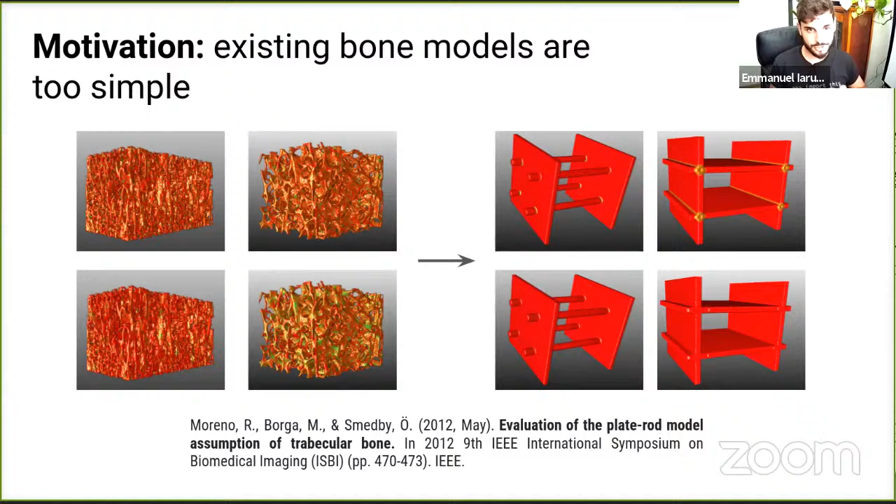This is often a very tedious and complex procedure, which could be avoided, especially if virtual synthetic models of bone are made available. For instance, in structural and resistance analysis, some researchers have proposed simple bone models consisting only of a few rods and plates intersecting each other. Even if these synthetic virtual models allow easy control of the target output, they often oversimplify the geometric structure of bone, which actually looks more like this, or also this.

In the context of computer graphics, several procedural techniques have been recently proposed to synthesize and control the deformation properties of fiber-like microstructures to be additively manufactured. However, for medical applications, the design of fine and detailed geometry that mimics realistic bone requires taking real human data into account.

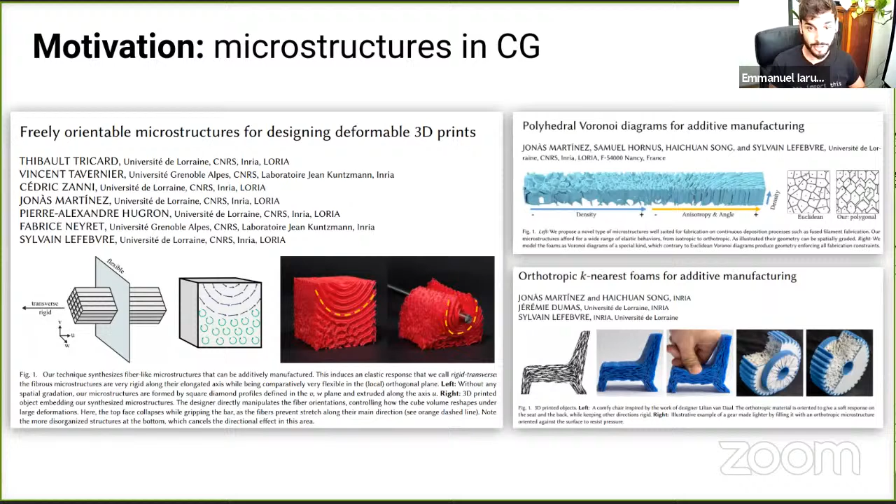We therefore developed a direct method to create 3D microstructural bone samples that, first, contain realistic structures similar to those in a bone scan dataset, and second, allow us to steer the properties to simulate changes from deterioration or medical bone treatment.

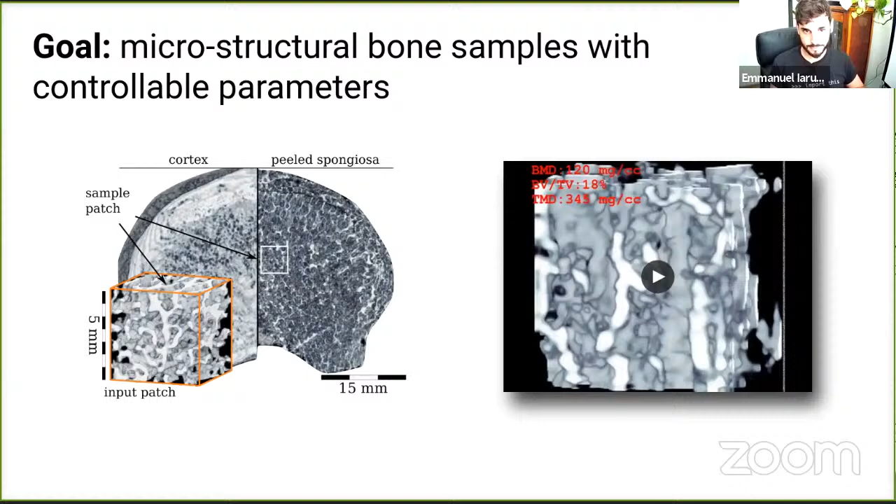We want to be able to synthesize bone samples, and specifically to compute and offer user control over well-known microstructural measurements commonly used in medical studies: first, the bone mineral density, the average density of the input volume and its standard deviation; also the bone volume ratio, the ratio of bone to total volume when segmented with a threshold T; and finally the tissue mineral density, the density of the segmented bone.

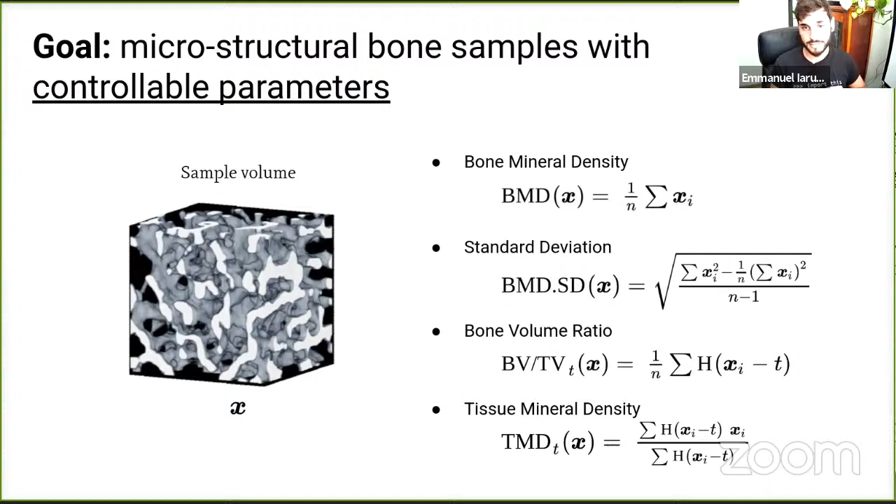In order to synthesize bone samples, we rely on generative adversarial networks, trained to stochastically generate samples close to the distribution represented by a training set. We train a generator network to map random noise to realistic 3D volumes, while a second network, the discriminator, learns to distinguish fakes from real samples.

Our training dataset consists of 12 human vertebrae scanned on a high-resolution CT. We subdivide these volumes to get almost 8,000 patches of 32 voxel size, augmented with 16 axis-aligned rotations and reflections, respecting the longitudinal anisotropy of form.

For the neural networks, we adapted 2D state-of-the-art generative models to handle 3D data and implemented several training schemes: a vanilla GAN, a Wasserstein GAN with gradient penalty, and a progressive growing GAN.

After training, we compared the randomly generated volumes against the real samples in our dataset in terms of microstructural parameter distributions. Since these parameters are not fully independent from each other, for simplicity we reduce the space to two linearly independent principal components, PC1 and PC2, which explain 99% of the variation on real patches.

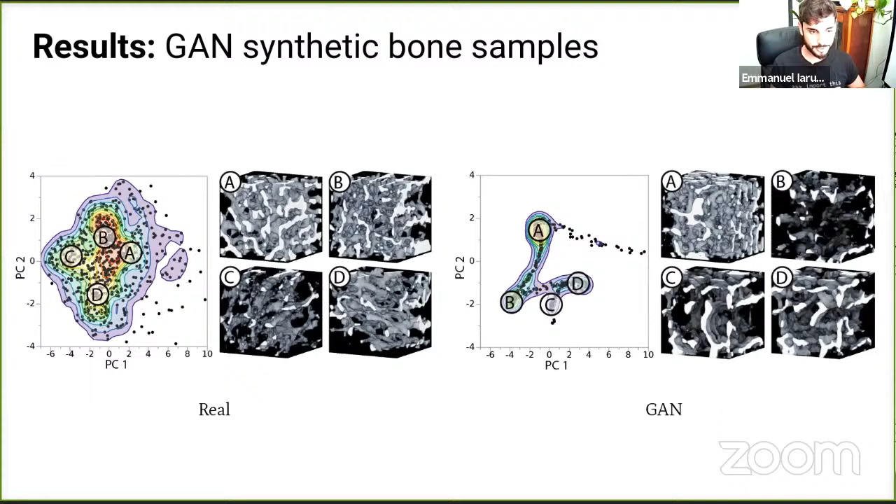The vanilla GAN was able to generate visually appealing bone patches, but the parameter diversity was narrow compared with the real distribution. In contrast, both Wasserstein GAN architectures were able to produce visually good results while covering a larger area in parameter space.

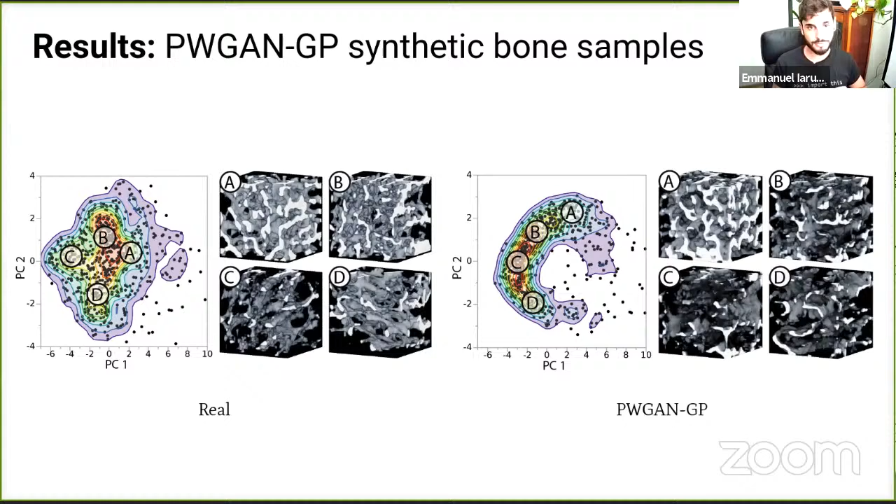Besides that, all neural networks underpopulated certain areas in parameter space. The progressive Wasserstein GAN generated patches that were visually most difficult to distinguish from the real ones, and in quantitative terms, only the progressive GAN was indistinguishable on all considered metrics. If you want more details, you can go to the paper.

A key ingredient in our pipeline is to allow user control of the sample generation. To achieve this, we draw inspiration from style transfer techniques, largely used in other contexts to transfer style between image pairs while preserving content. We therefore frame an optimization problem over the latent space of our trained generative model.

In the spirit of style transfer techniques, we define the content as the target volume we want to stick to, providing the general structure constraint in our optimization. The target volume can be a sample from a training dataset or a random volume produced by our generator network.

For the second term, we redefine the notion of style for 3D scans of human bone. In our context, style refers to a given set of microstructural properties that our generated sample has to satisfy. The optimization aims to find a vector Z prime in this latent space, compromising the content and style goals. Notice that to minimize this objective, the operator P, which computes the set of parameters over the volumes, has to be differentiable.

That's the reason why we derive new differentiable formulas for the bone volume ratio and the tissue mineral density parameters. We achieve smoothness by defining parameters that are strictly monotone in T, and define a soft-pass function, parameterized with a fuzziness factor epsilon, to replace the crisp threshold operator. More details can be found in the appendix of our paper.

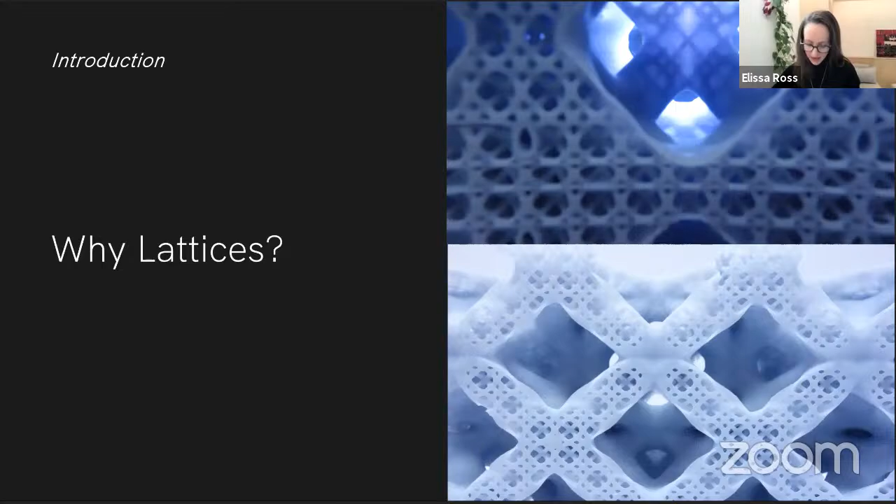So before I start those topics, I want to try to motivate this with the question, why should we care about lattices? And to do this, I want to take a very zoomed out look. I want to talk about material property space.

So materials, of course, are all around us: wood, glass, metals, all kinds of things, plastics. And there are all kinds of properties that these materials have. So they might have a particular strength or density. They might be brittle or tough. They have a certain Young's modulus.

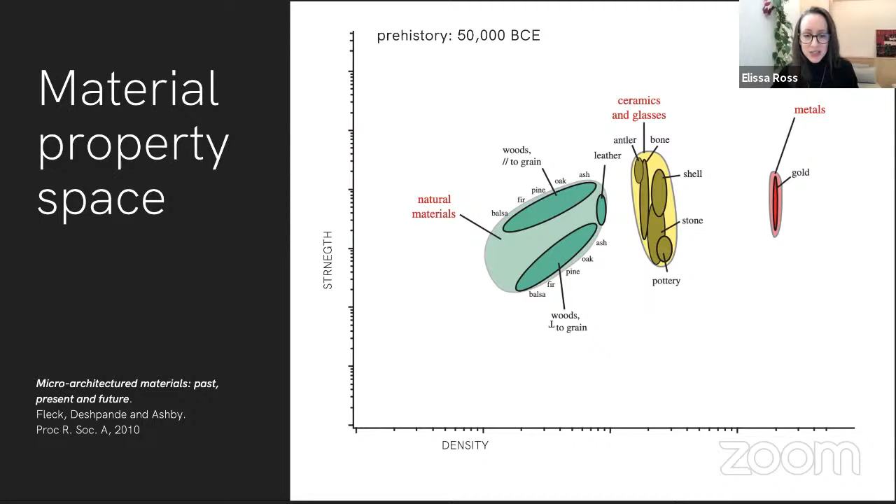Zooming back in time to prehistory, around 50,000 BCE, this is a picture of what materials our human ancestors had available. We see all the natural materials, things like bone, shell, and antler, and they also had gold.

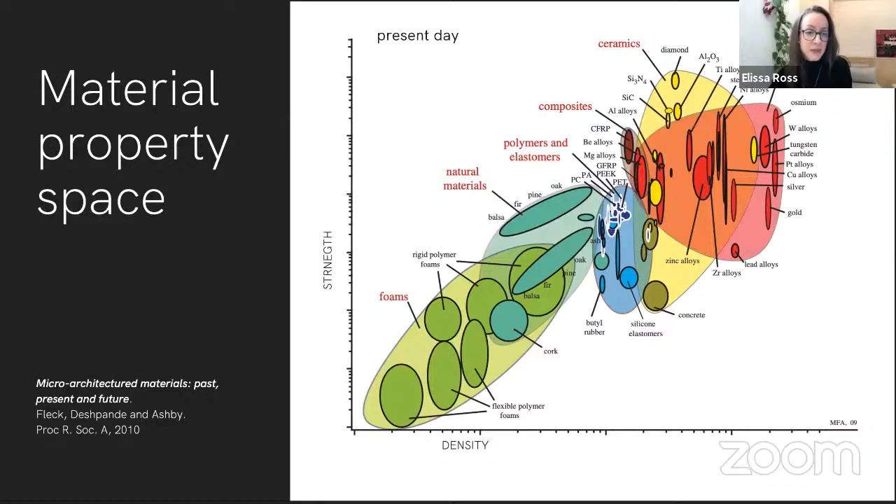So the question is, there's still a lot of white space on this chart. How do we fill that space? How do we find materials to cover this breadth of material properties? Now, the corners here are inaccessible due to fundamental properties of matter, the size of atoms and the nature of the forces that bond them together. But there's still a lot of white space adjacent to the materials we know. How do we push into those areas?

There are two strategies to do this. The first is through chemistry, but it's the opinion of people like Michael Ashby that this has been fairly well explored at this point, and future changes in this area are more likely to be incremental than stepwise.

Whereas the other strategy we can use to fill material properties is through looking at geometry or architecture—here I mean architecture at a very small scale, so really controlling microstructure, much like in Emmanuel's talk. This offers new potential.

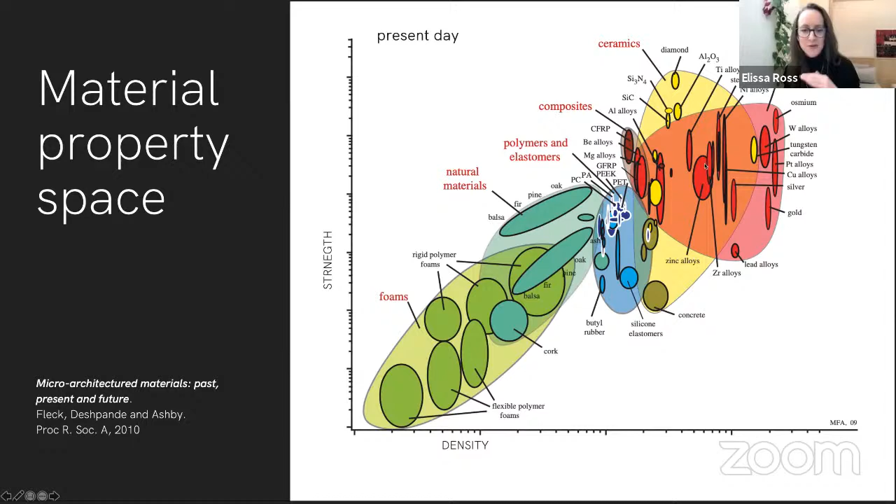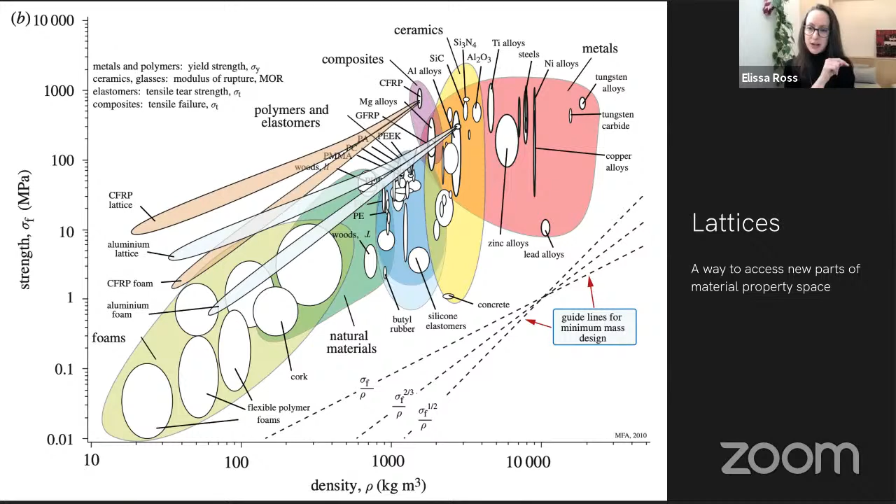You can actually think about this in the context of 3D printing. 3D printing will spit out a certain material, but then you can get different material properties by changing the geometry of what you print. So this is why we should care about lattices.

This brings me to the outline for my talk, which has two parts. One is about prediction—how we work lattice geometry from a design side, and this is a mesh consultant's topic. On the other side, I have a validation topic. Using this term a little loosely, what I really mean is just producing physical objects, and that is the metafold part.

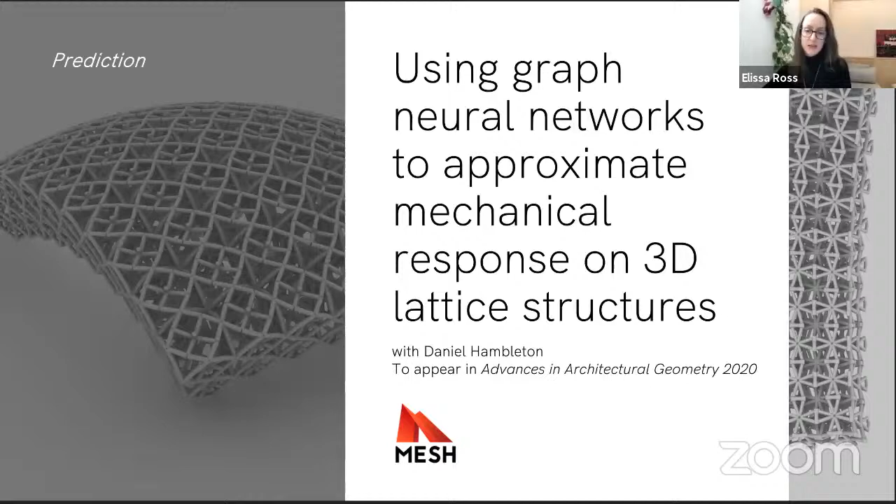In the first part, I want to talk about some recent work. This is joint work with my business partner at Mesh, Daniel Hambleton. This is going to be appearing in Advances in Architectural Geometry 2020, which is actually happening next month. The topic of this is using graph neural networks to approximate mechanical response on lattice structures.

To get going, I thought I would say a brief word about Mesh, because I think that provides an important context for this work. Our tagline at Mesh is solving critical geometry problems in industry. I think you all know what geometry problems are, but just to unpack the critical and industry part...

We tend to get called when people have reached the limit of their software and what it will do in terms of tackling some kind of real geometric challenge. So we do work in a variety of areas from architecture through engineering. We tend to do a lot of software development, source code development. Unfortunately, a lot of our projects are also under NDA, so we don't get to talk about so much of that. But we also have a strong research and development mandate, which is what I can talk about today.

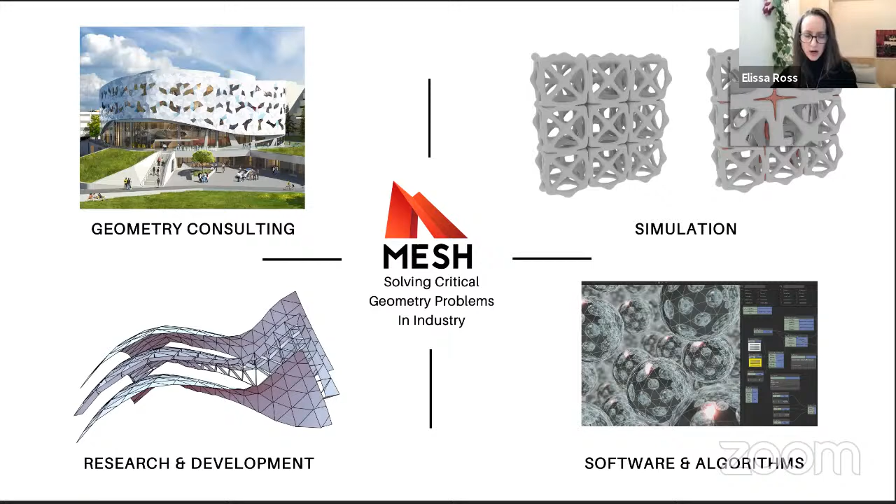Let's talk about some of the actual challenges with working with lattices. We've motivated the idea that lattices are really cool and we want to use them, but how do we actually do that? The first challenge is just a selection challenge. There's this vast, infinite space of possible 3D lattices. How do we actually select one for a particular application?

Typically this means we're looking for something with a particular performance metric that's going to hit some material property we're interested in. But how do we actually search that space?

The answer to that usually rests on simulation. So we would take these structures and do some kind of simulation to detect their material property. But this is actually quite challenging. This is usually done by finite element analysis.

There are certain kinds of lightweight forms we can use, but they tend to be lower fidelity, and we want to move to a more accurate simulation. It gets very difficult because of the complexity of the geometry. So this makes that whole process very, very slow.

Our question was, is there something we can do here using machine learning in a predictive way? Can we use machine learning to predict the effect of compressive forces or geometric deformation on lattice performance?

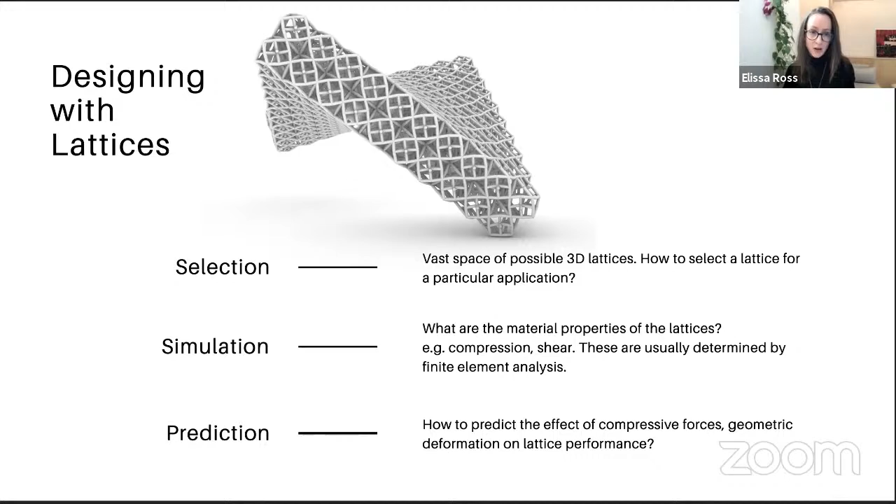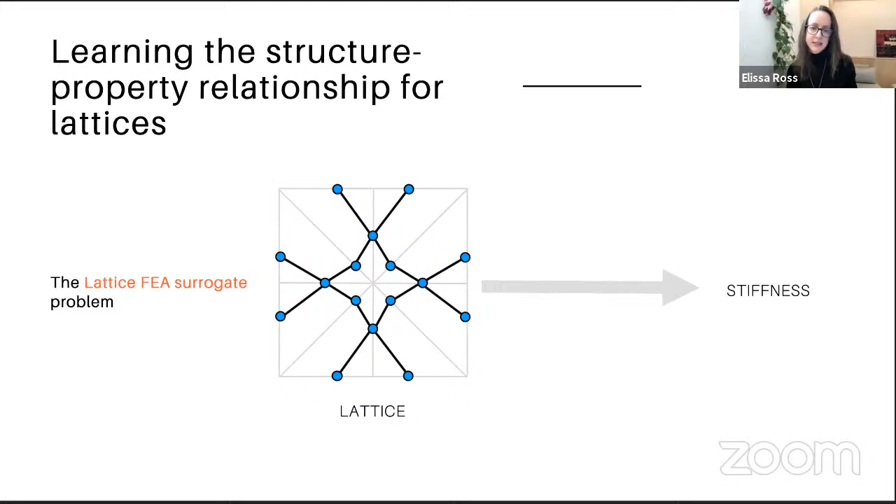This can be thought of as the structure property relationship for lattices. So we have a lattice, we're interested in learning about its stiffness, and we want to use machine learning as a surrogate for finite element analysis.

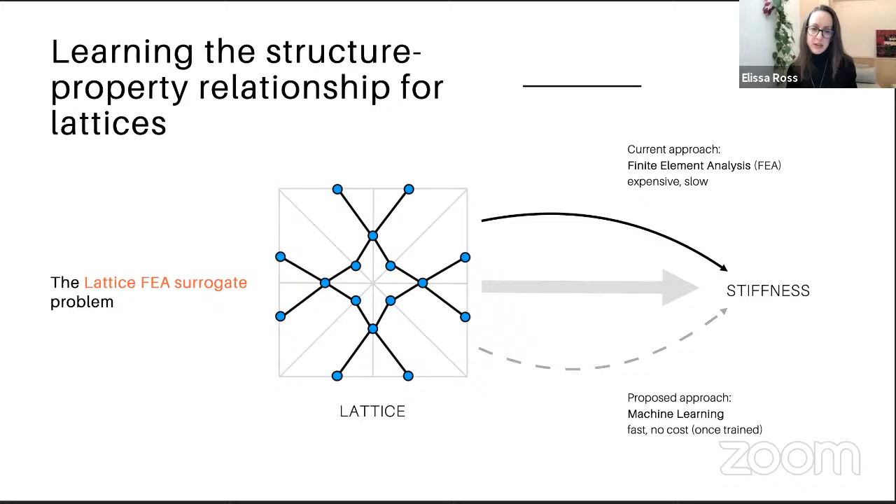So the current approach is quite slow and expensive, and the question is, will machine learning have something to say here that will be more useful?

Of course, there are significant challenges to this. A typical machine learning model ingests only flat or Euclidean data, whereas lattice data is by definition heterogeneous. We may have different numbers of nodes and edges. And also typical models require data that is invariant to transformations, whereas lattice data is inherently geometric in 3D.

So the usual techniques that work in 2 dimensions to tackle this become much more computationally problematic or just time-consuming and expensive in 3 dimensions.

That leads to the topic of graph neural networks, which are well suited for this type of lattice, because what I'm talking about right now are lattices that are graph-like. You can think of them as embedded graphs.

So what is a graph neural network? Essentially, I'm not going to give much detail here, but essentially a graph neural network generalizes the methods of deep learning to graph structured data.

And I think this picture is really illuminating. You can think of Euclidean data as a graph, but a very, very structured and orderly graph where we know exactly what the neighbors of any given point are. Whereas graph structured data is much more heterogeneous. We don't necessarily have the same number of neighbors for every node, and there's just a lot more uncertainty.

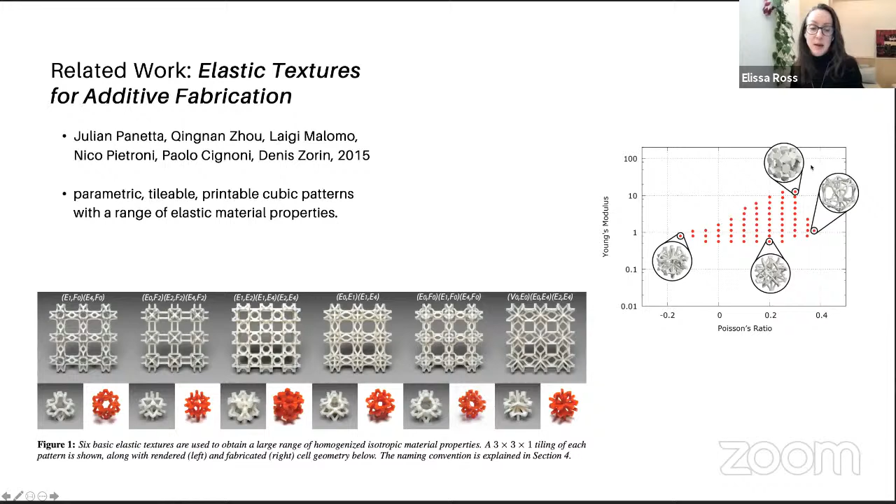One thing the authors do is give a really nice way of encoding lattices and generating a large data set of lattices. So we use the same method.

Generally speaking, we can think of lattices as being built from unit cells. A unit cell is a recipe for a lattice, in the sense that it is the quotient of some kind of repetitive network under the three translational symmetries of 3-space.

But what Panetta and his co-authors observe is that we can also take a smaller representation by taking a further quotient if we're looking at cubic lattices. A cubic lattice will have all the symmetries of the cube, so we can quotient out by the symmetry group of the cube, and we end up with these tetrahedra, the cube broken into 48 tetrahedra, and we can define the lattice as just what geometry appears in one of those tetrahedra.

Like many problems in discrete geometry, lattice data has a combinatorial element and a geometric element. On the combinatorial side, we're asking what is the graph of the lattice pattern, the smallest unit that's going to capture the lattice. You can place nodes on the vertices, on the edges, on the faces, and they're going to have different degrees of freedom depending on where they're placed.

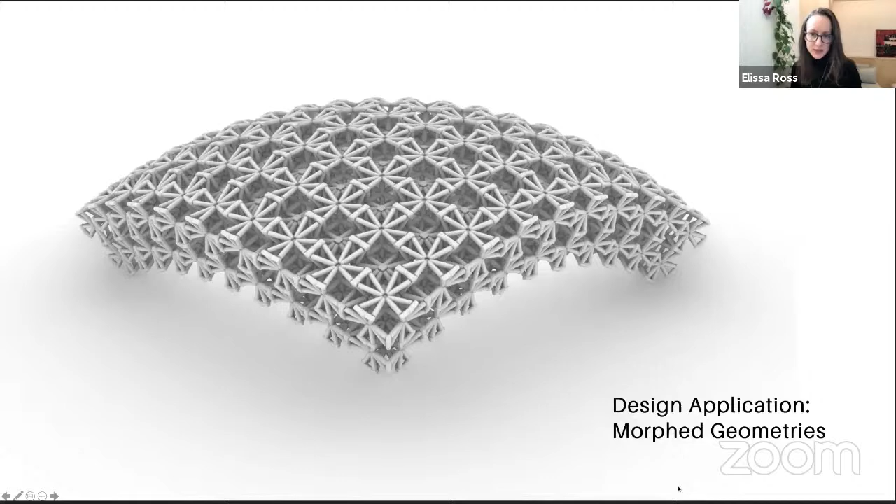Okay, so how might we want to use this? The idea is that we might start with some kind of lattice structure that's populated on or around some kind of volume. And maybe that design volume is being pushed or pulled, and we are interested in getting predictions of relative compressibility of the lattices. And so we can actually do this.

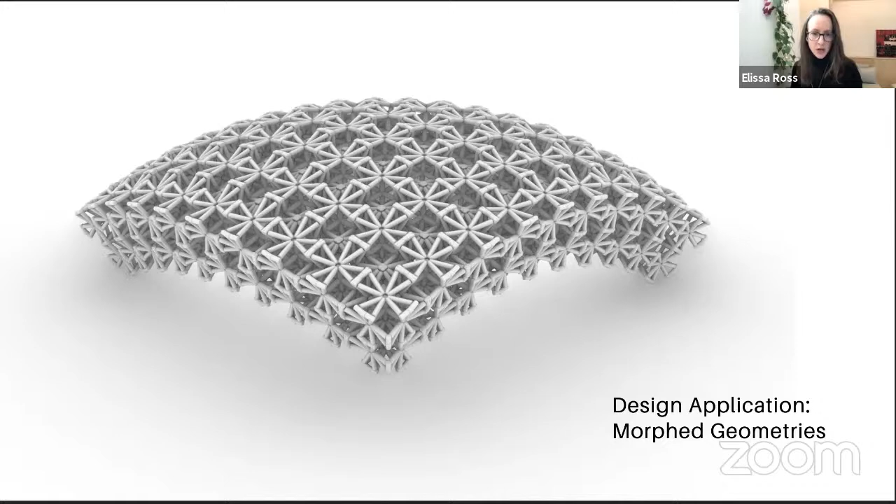So the question is, are the lattice units more or less stiff than the undeformed case? So it doesn't give us a prediction about the aggregate behavior - it's not like a surrogate for finite element analysis on this whole thing, but it at least offers us this understanding of areas of relative strength or weakness.

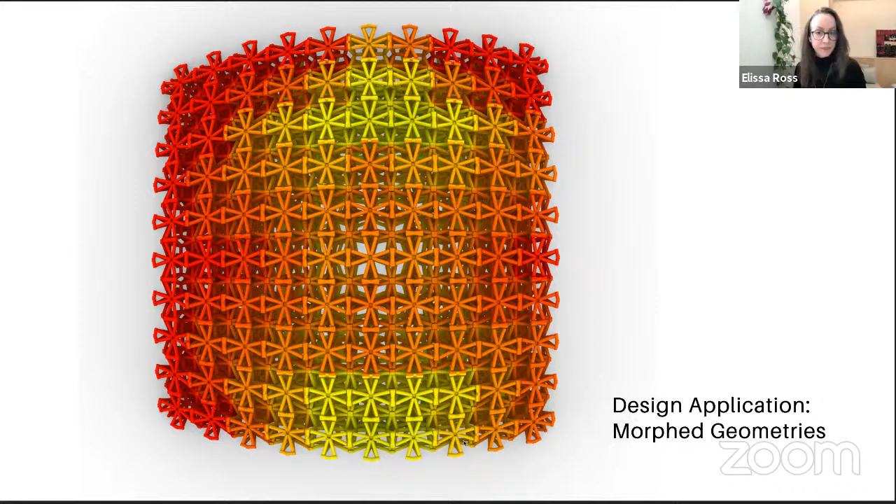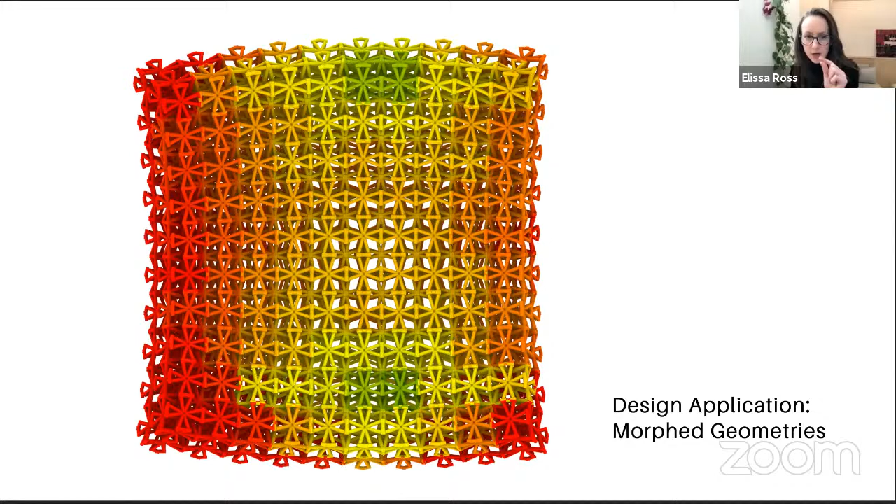And just to say something about the colors: the yellow represents the same compression as the undeformed version. The green is half as compressive, so these are stiffer. And the red is 1.5 times as compressive, so these are softer. And here's another variation on the geometry.

Okay, so where did we get to with this?

To summarize the contributions here, this is the first instance that I know of material properties being predicted from lattice geometry in this way. We use graph neural networks to capture the lattice geometry and combinatorics, and there's a lot of room for figuring out those hyperparameters more.

This offers the potential of real-time structural feedback for designers without the cost of finite element analysis. So this is kind of the performance-aware design idea.

It's worth saying that despite how densely we did have to sample to get those results, it also really outperforms a kind of lookup or interpolation approach, which would require so many more data points for similar quality results. There's no good way of capturing what the appropriate distance metric would be on the space of lattices or lattice features, or at least I don't know of one. So it seems like this actually has some potential for that application.

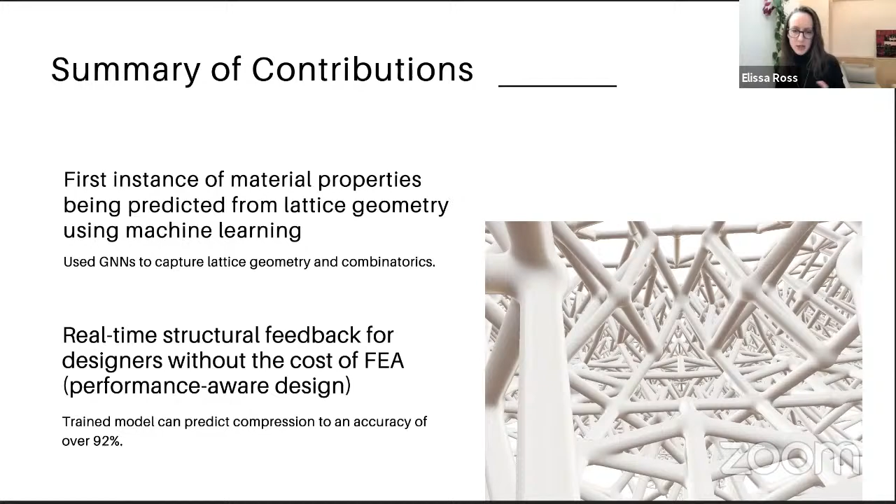In terms of next steps, I've mentioned the idea already of creating a higher fidelity simulation. Also, the success we had with smaller data sets suggests that we could build up a larger data set with many combinatorial types that had 2 or so thousand geometric samples per type, and that could be a more successful data set.

One way we could imagine using this is kind of like that Panetta paper I mentioned in the beginning, that you could create a little library of lattices you were interested in using and train a model on each of those lattices, then use that trained model to really get an awareness into the design phase. First, the kind of holy grail of these sorts of problems is the inverse problem, and this is what Emmanuel was talking about, which is so cool.

Here you input a compression target, and then you output a lattice. The challenge here is that lattices have so many design parameters that it's really hard to imagine how that would come out of such a model.

Although I am hopeful for this because some of our best performing models did use offsets as their geometric features, and offsets are kind of like a recipe for a lattice.

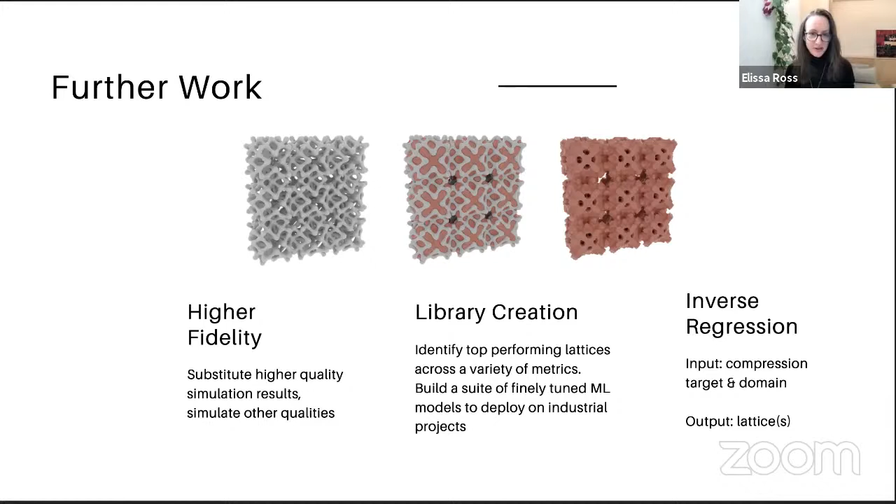Okay, so that was part one, the prediction part. I sort of zoomed through that because I wanted to get to part two, which I'm super excited about. This is the validation part where I'm really talking about producing things.

So what I want to tell you about is a new 3D printing technology that we built specifically for lattices and metamaterials. This is really informed by the work of the previous section and some of the challenges I already mentioned about working with lattices.

Our tagline at Metafold is 'Shape Matters.' I hope I'll be able to communicate to you why we think that.

Before I start, I just want to acknowledge that this project is definitely one of, it is the most significant research and development project we've undertaken at Mesh, and it's absolutely a team effort. I'm feeling super lucky to be here talking about it, but it's absolutely a team effort. It's really Daniel and Tom putting together hardware and software that results in this work.

As an outline of this part of the talk, I'm going to give some motivations for why we created this, talk about our solution, which is called LightCycle, show you a bunch of sample geometries - there's a few on screen right now as well - and then I want to end with a vision and also an invitation.

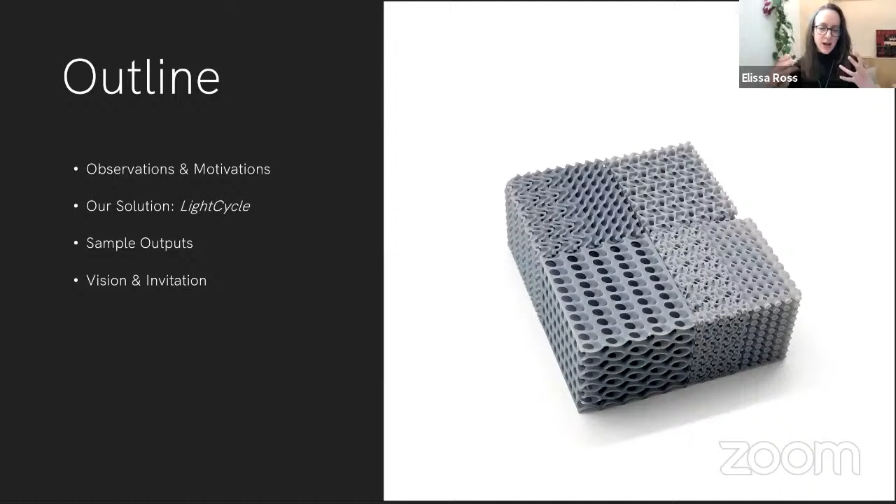I believe I've already probably motivated this through the first part of the talk, but just to say a little more: Mesh has been around since 2012. We've been applying mathematics to topics in architecture, engineering, and industry. We've worked on a variety of projects, including one in predictive geology, where we were looking at really dense and challenging microstructure geometries. Since 2017 we've been on a sportswear contract, where the idea is our client is really interested in using metamaterials to enhance human performance, and a lot of the things I've mentioned about lattice geometry and why they're challenging comes up in that project.

Now, 2020 happened. 2020 was a year like no other, and like many small businesses, Mesh had a slowdown in work, and we took the opportunity to do this research and development work. And we have a kind of unusual team.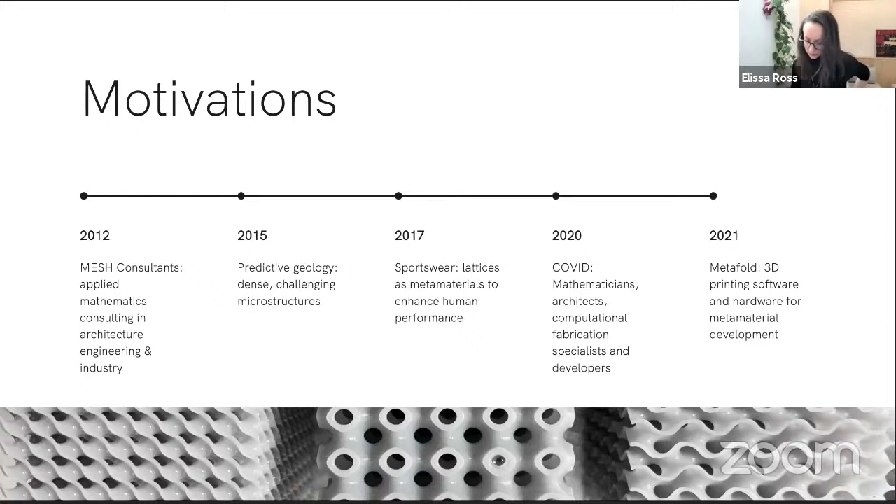Sylvia mentioned interdisciplinary work in the introduction, and it's true that our team is really unusual. We've got mathematicians, architects, computational fabrication people, and hardcore C++ developers all together. So what comes out of that? The answer in this case is this 3D printing technology.

So what is a metamaterial? My favorite example of a metamaterial is just a piece of paper. We all know what a piece of paper is like, what it feels like, what its properties are. It's very floppy. But if you put an accordion fold in a piece of paper, you can set it down on your desk and it will actually stand up. So suddenly, through changing the geometry of the paper, you've given it different material properties, more structural rigidity.

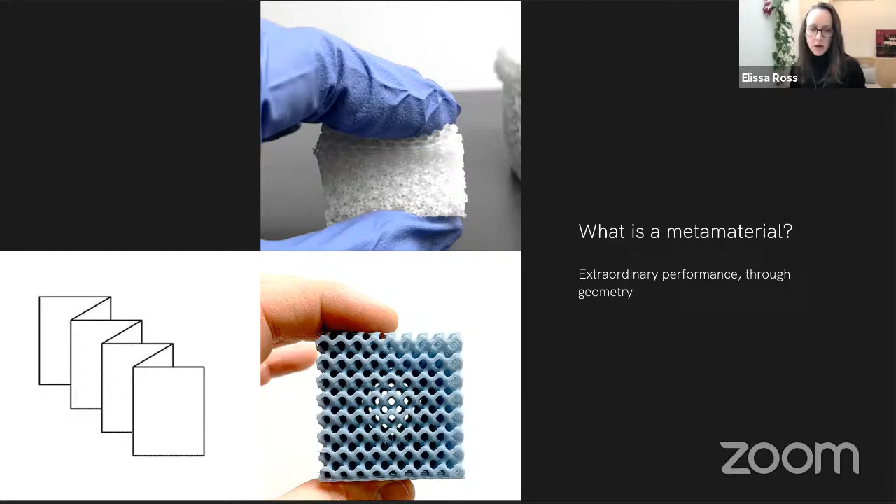That's the basic idea of a metamaterial, specifically a mechanical metamaterial, where we're using geometry to extract some kind of performance. This comes up all over the place, like lightweighting—the aerospace industry is always searching for super high strength, super light materials, so they're very interested in metamaterials. Also for protective equipment like hockey helmets, footwear, or even spacecraft that need to resist ballistic impacts, these can be a really useful way of obtaining that.

As I said, we've made observations through our role as industrial consultants. One of the main observations is that the speed of developing new metamaterials and working with lattices is very slow—the whole design, print, validate process just takes a really long time. There's been this idea, this promise of additive manufacturing, that it's a very materially efficient and sustainable technology where you get geometric complexity for free. Our observation is that doesn't really seem to be true—at a certain point of geometric complexity, it's no longer free. It's challenging, if not impossible.

So we were really interested in printing those things that are so geometrically challenging that other print systems can't tackle them. The solution we came up with, we're calling LightCycle. The basic thing we do is print very highly detailed and complex geometries in large print volumes. We specifically built it to print lattices and microstructures, where the features are really not well captured in traditional file formats like STLs or any other format you might want to save these things out to.

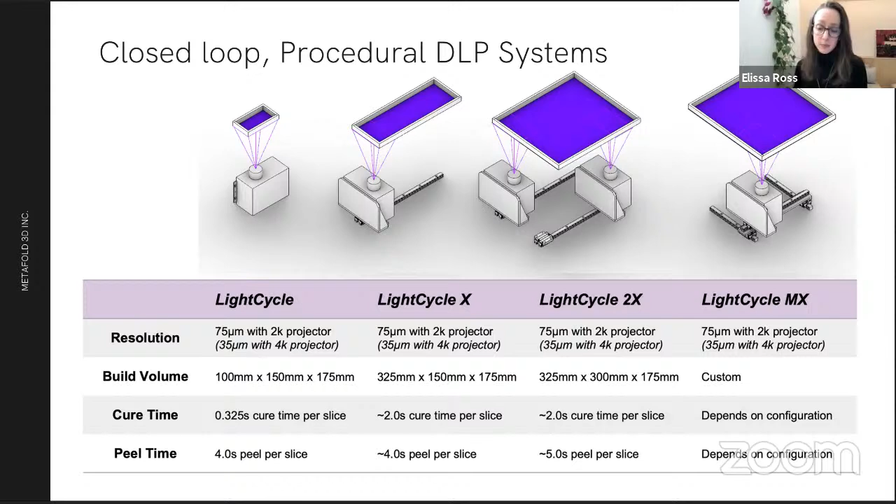Okay, so now I want to show you some of the things that we have printed in this way. We have a reasonably large library of TPMS structures - triply periodic minimal surfaces. These are really nice structures, different from the ones earlier in my talk because they're surface-based as opposed to beam-based. They have this property that they are locally minimizing surface area, and they're well approximated by Fourier approximations, so they have a really nice representation as just a single equation, a single line of code with the build space parameters.

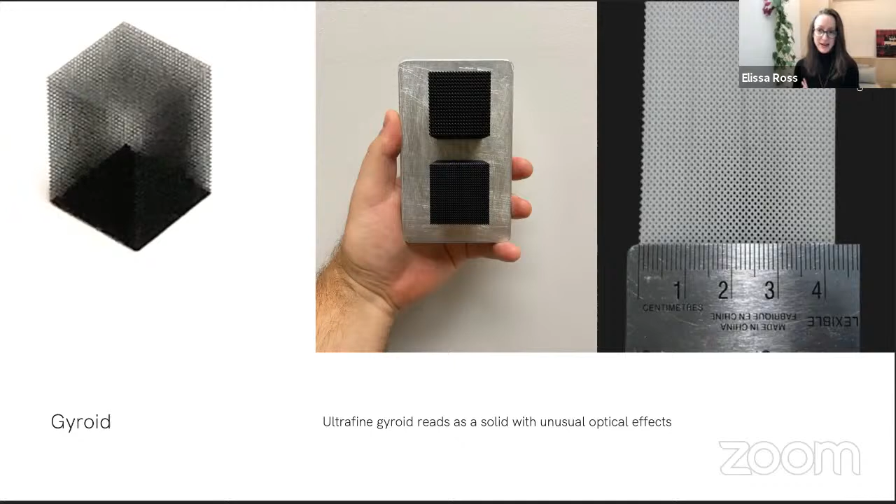As you can see, this is a really fine print. What's significant here is that each of these little dots is a lattice unit cell. To my knowledge, other printing methodologies can print hundreds and maybe thousands of unit cells, but with our technique, we can print millions or tens of millions at this point. So it's really several orders of magnitude different.

We are also really excited about the prospect of printing fabric type geometry. So this is a chainmail. This was honestly a very quick test, but we feel like it has some promise. In particular, because we use a DLP, this is very fast - we cure a layer at a time, and since it's only a few layers thick, we can do it very quickly. But eventually we want to push into more knit-like structures and even woven structures.

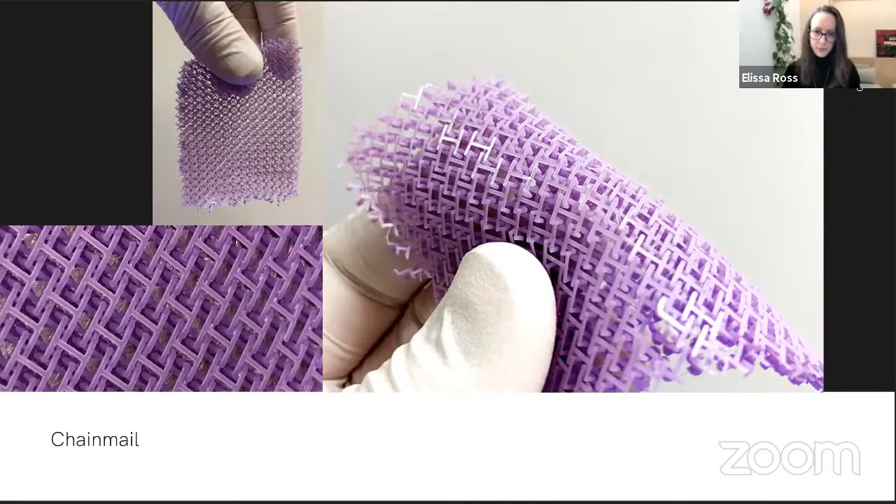This is another super cool form, a hierarchical lattice - there's a lattice, and the lattice is filled with another lattice shape. These have really unusual mechanical properties. Tom printed this, he mixed up some flexible resin and printed it, and then he said, I must have made a mistake, this thing is totally rigid. But it wasn't - he didn't make a mistake. It's just that the geometry makes this super strong, despite the material it's actually printed with. There's also possibility for a lot of thermal connectivity for something like a heat exchange application, which we're exploring. And I've also challenged Daniel to a three-layer hierarchy of lattices, so stay tuned for that.

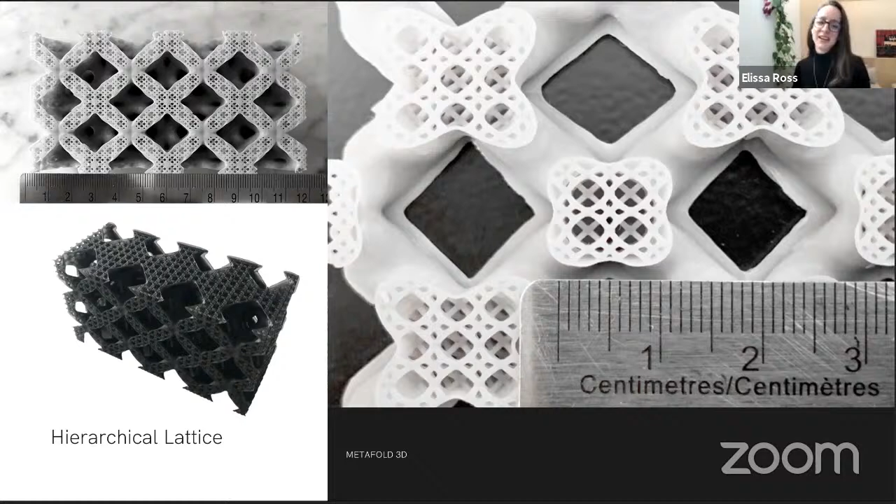I did get really obsessed with spinodoids for several months last year, and I think I drove my colleagues crazy, but it amounted to some good stuff here.

Just to wind down, under the hood, what is this technology? We can think of this as a programmable shader pipeline to a 3D printer. We're always reading in the hardware state, generating geometry based on the hardware state. The computation is done in layer time, so we have a computation budget where we can do things as long as it doesn't take too long per layer, because any increase per layer amounts to a huge increase in the print time.

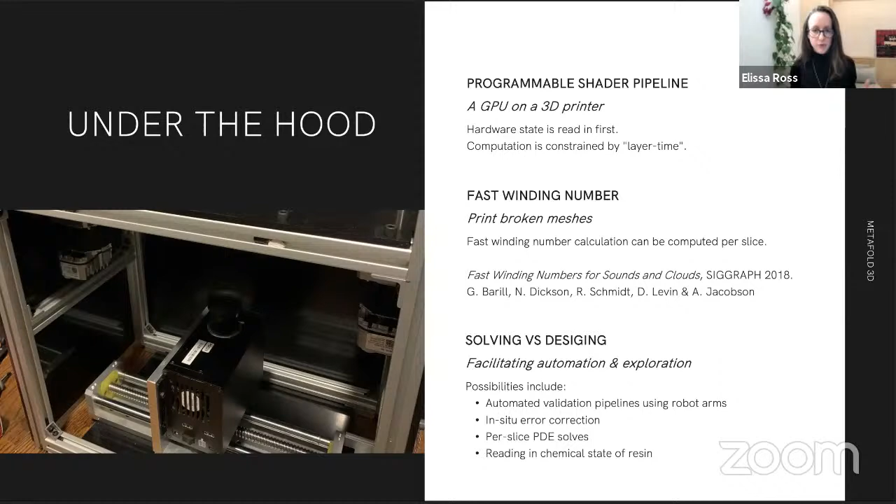Whether this is some kind of automated validation pipeline using a robot arm that takes your printout, physically tests it, and then feeds the results back into your system, or whether it's solving some kind of differential equation on a per-slice basis, or even reading in the chemical state of the resin for more sophisticated types of non-polymer printing, or just polymer variations.

In terms of applications, I've talked a lot about mechanical metamaterials and lattices, and clearly we've done that. More generally, I think many of you are in a very good position to think about what kinds of procedural geometries would lend themselves to this type of fabrication methodology. There are certain things you can do procedurally that are so much easier than in standard CAD workflows.

An example is that hierarchical lattice, also things like adding noise or surface roughness. But even more blue sky is the human lung. There's this fact that if you unfold the surface of the human lung, you could cover a tennis court — the surface area is enormous. Obviously that's not something you're going to be able to print using an STL or something like this, but can we capture that through an algorithm and print it procedurally?

At this point, I want to extend an invitation that we're very much open to and interested in collaborating with people, especially in the geometry processing community, who are interested in pushing the boundaries of the methodology. I would just ask: how does shape matter to you, and how would you see this printing methodology? What would you do with it? Thank you very much for your attention, and I am looking forward to questions.